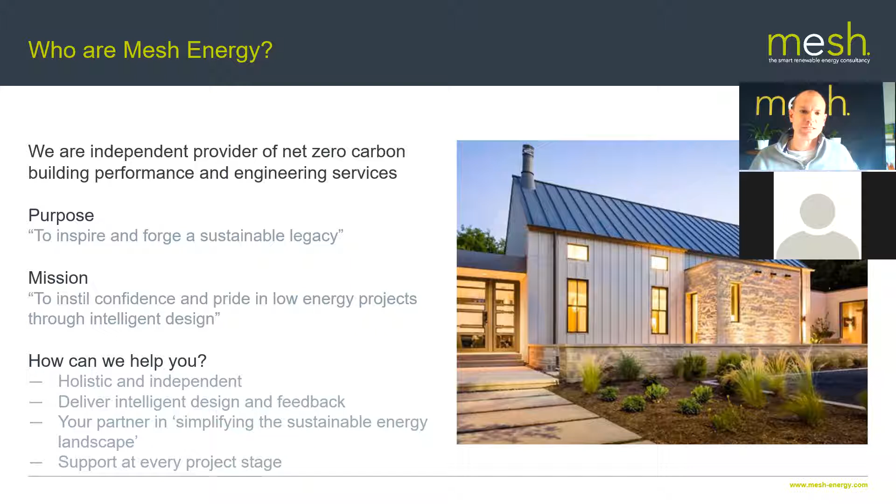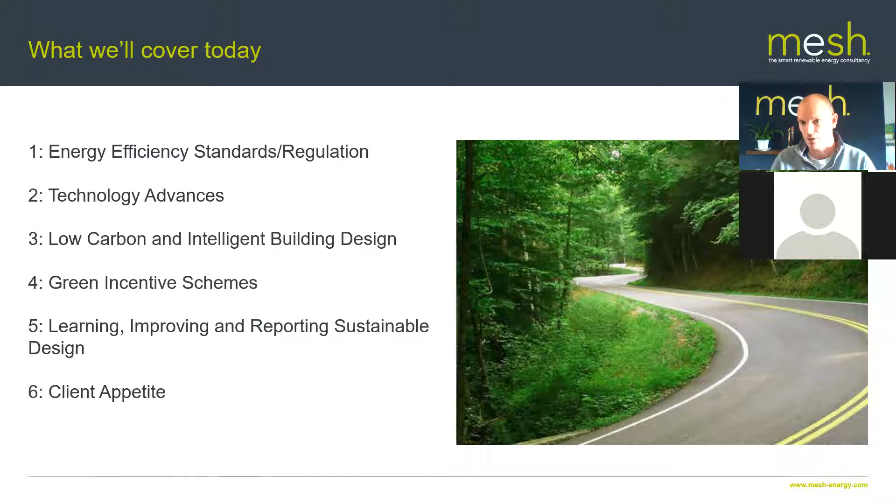We'll be looking at learning, improving and reporting sustainable design, some of the trends that we see there. And then finally looking at client appetite. I put client appetite in last year's presentation, and it's fascinating, as we'll go on to see, the sheer demand for sustainable design and the big market appetite for that. So we'll go into a few bits around client appetite and what we're seeing. A few things to cover there.

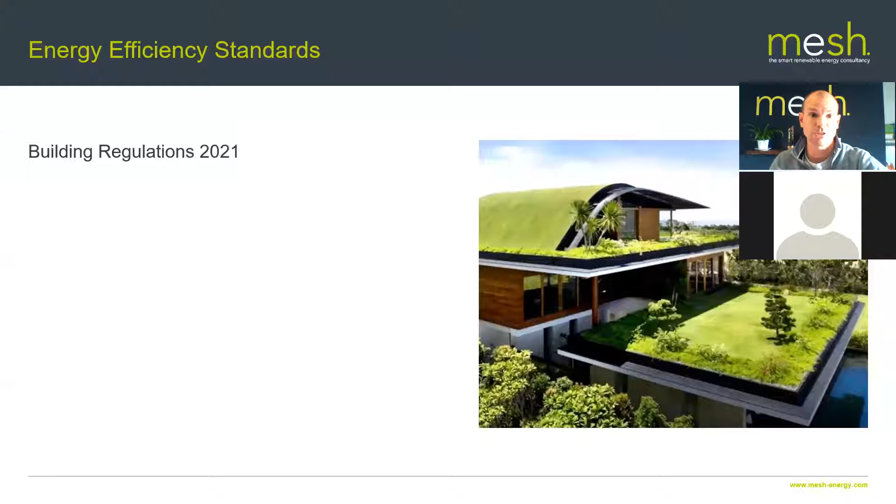Let's start with energy efficiency standards. We've got the building regulations, which we know are changing this year. They're changing in June. It was announced in December that the building regs in the UK are coming into effect, and there were consultations over the last couple of years. This is all working towards the Future Homes Standard, which comes in the middle of the decade in 2025, which will come around very, very quickly. So this is a kind of stepping stone.

The fundamental changes here are to Part L, which is around energy efficiency, and Part F, which is around ventilation. They've made a few changes to Part F, nothing particularly groundbreaking, but the biggest change or the biggest step forward is around Part L. This looks at a 31% carbon reduction based on today's regs, and this will be achieved through a combination of fabric and renewable technology.

So essentially by law, you won't just be able to bolt solar PV panels on, or put an air source heat pump or ground source heat pump in. You're going to have to improve the fabric of the building to new notional U-value levels and do renewable technology to get you to that 31% reduction.

The other big change which is coming in is the new Part O for the building regulations, and this is around overheating. Now this for many years has caused increasing headaches, particularly in London and other built-up areas. This was led by the Greater London Authority, really, and the push by the Mayor of London to increasingly look at overheating and avoid the heat islanding effect. But this has now spread to the wider regulations, and we're going to do a whole CPD on the overheating standard and what is included in Part O and has been released.

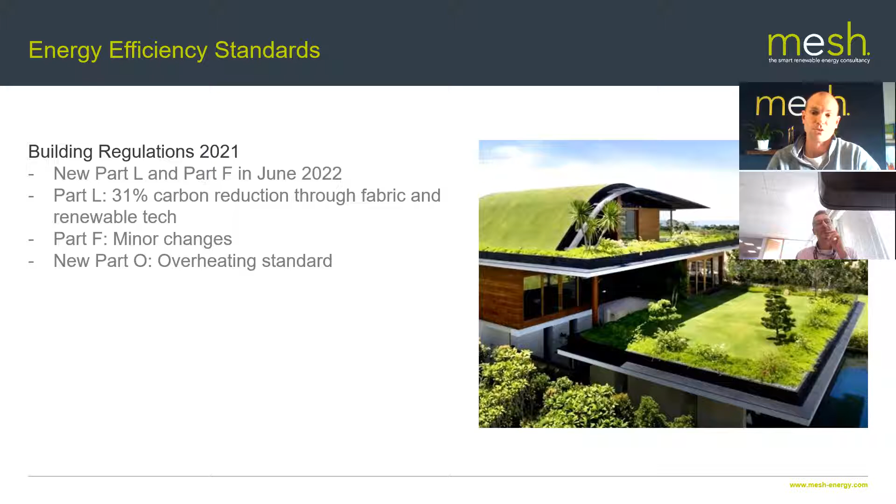Or some other building physics package, which we kind of do as standard, but whilst this was optional before, it's now going to be regulation as of June. So again, people trying to push the boundaries domestically with the amount of glazing they're trying to put in, or doing commercial work, you're just going to have to do this. It's not mega money, but it's something you're going to have to do to prove due diligence, making sure the health of the occupants because of thermal conditions throughout the years is a key priority and within thresholds.

So our prediction here, our comments are: building regs changing, that's great. It should have happened a couple of years ago, but it didn't. It's happening now. It is an improvement, and the Future Homes Standard in the middle of the decade will see a 70%, 75% reduction on where we are today. So this is a great stepping stone, giving us a few years to get used to it before moving up to the next level.

But you will have seen this a lot in the press if you read around this. It doesn't really go far enough. We're going to see regulations falling well behind what the industry expects buildings to be achieving, what clients want buildings to be achieving, and where the market's going. So looking at both fabric improvements and technology improvements is great, but really, as soon as these regs come out, they're going to be obsolete. People are going to be building in advance of where these regulations are at. So it's great, and particularly with the overheating standard, a big thumbs up for Part O coming in there. That is definitely something which we see as a big positive step.

Whether by lack of education, naivety, or just laziness, buildings that should have had overheating work done on them didn't, and really suffered once they've been built. So that's a great obstacle to overcome by law. We see it kind of coming in - a great move in the right direction, but overall the changes to the regs are a bit lukewarm. Really, the market will have moved on. They should have gone the next step to make them relevant for the next few years.

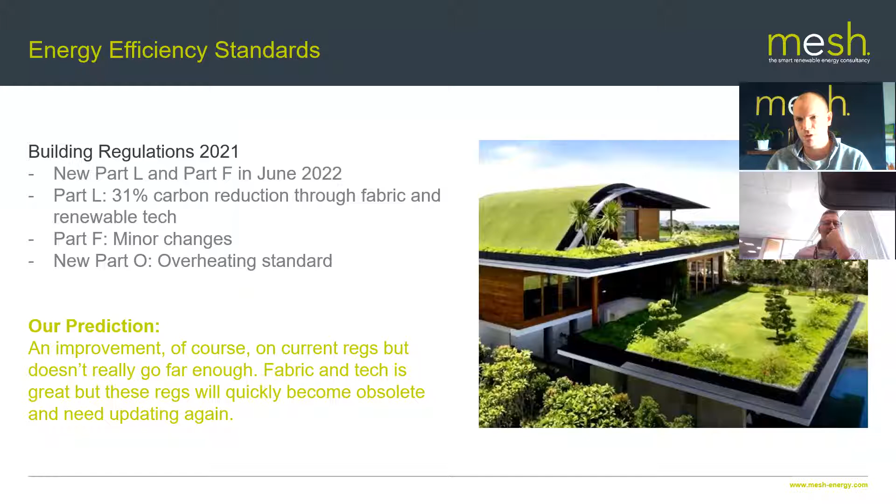We'll do plenty on the way these regs are changing, how they relate to RIBA 2030. I think we're going to do one video in February and one on overheating. So we'll unpack this a lot more, but this is what's happening.

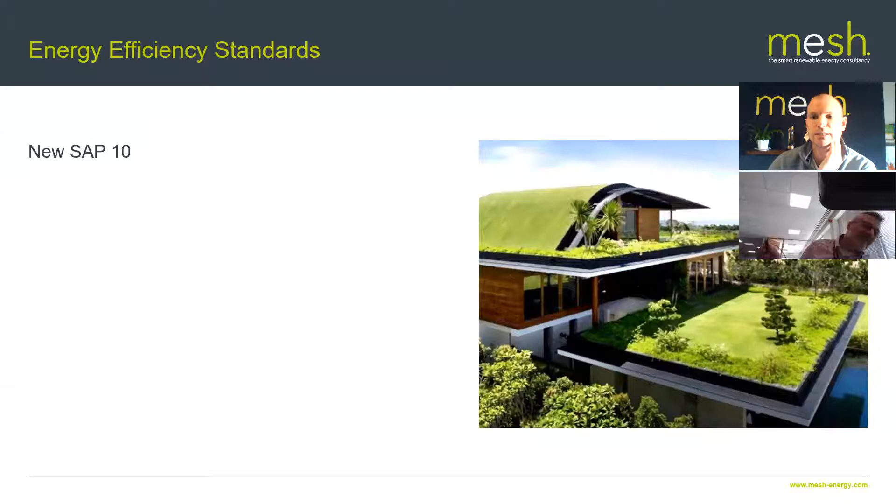In line with the change in regulations, we're going to see a long overdue update of the Standard Assessment Procedure calculation - SAP, and it's now going to be SAP 10. I think it's 10.1 or 10.2, can't remember where they've got up to, they keep tweaking it. But they've talked about releasing this over the last few years. When they release the new building regulations, this new assessment methodology, which you get your EPC from at the back end, is going to change. There's quite a few changes here which are really making SAP calculations more intelligent. They're still a fairly blunt tool, but they are moving on as part of this new release.

So a big one here is the changing, or reducing, electricity carbon factor. Over the last decade, the electricity decarbonisation of the UK's grid has undergone massive change and decarbonised by at least a third, but current SAP calculations don't take that into account. So the new SAP 10 will have a far smaller carbon impact when you're using electricity, which is great if you're putting heat pumps in, or other electrical devices in. You won't get penalized anywhere near as much as you did.

There are new lighting details you can put in. You can now say you're putting energy storage in and solar diverters into the building, which will have an effect again on energy usage of the building. You can include shower flow rates, whether you're putting in electric showers. So there's a few more details you can put into the SAP calculations. Wastewater heat recovery will be more prominent.

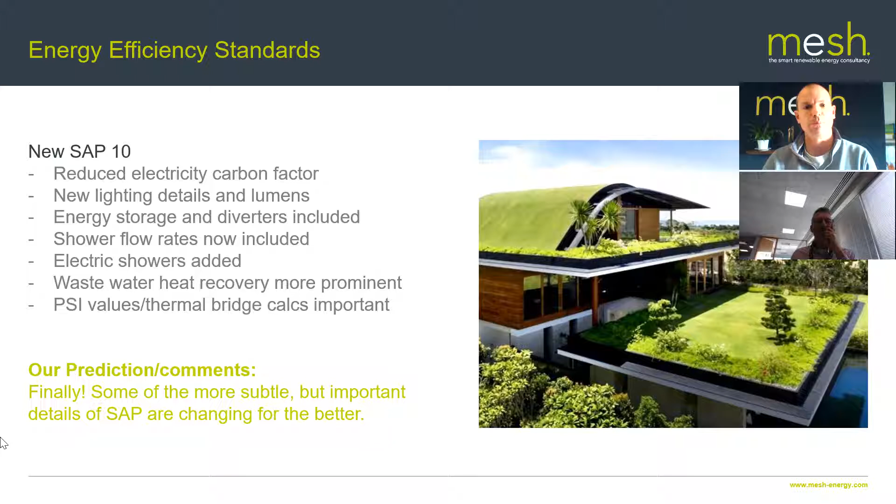So this is all going in the right direction. It's frustrating how long it's taking, but it's great that SAP will be updated at the same time as the other regs in June of this year. The other thing I wanted to mention here was various kind of standards and guidance.

We saw a great amount of work from LETI and in part the RIBA happening last year. I'm not aware that the RIBA 2030 climate challenge is going to change or evolve this year. I think it's just there now. They've laid out their stall, made a slight revision to it. We've got a few different buckets or building types and targets for embodied carbon and health and well-being. I don't think that's going to change, so use the current climate challenge documentation as read.

As far as embodied carbon goes, I think what we will see is a lot more guidance this year on embodied carbon, how to understand it, how to accurately model for it. Software companies like One Click LCA are pushing hard to try and create tools and build that database of embodied carbon for a vast amount of materials and catch up with the marketplace. I know a lot of manufacturers are pushing to understand and document the embodied carbon that goes into products as well, so that you can put that data into your calculations. But there will be further lobbying to try and move the embodied carbon discussion ahead.

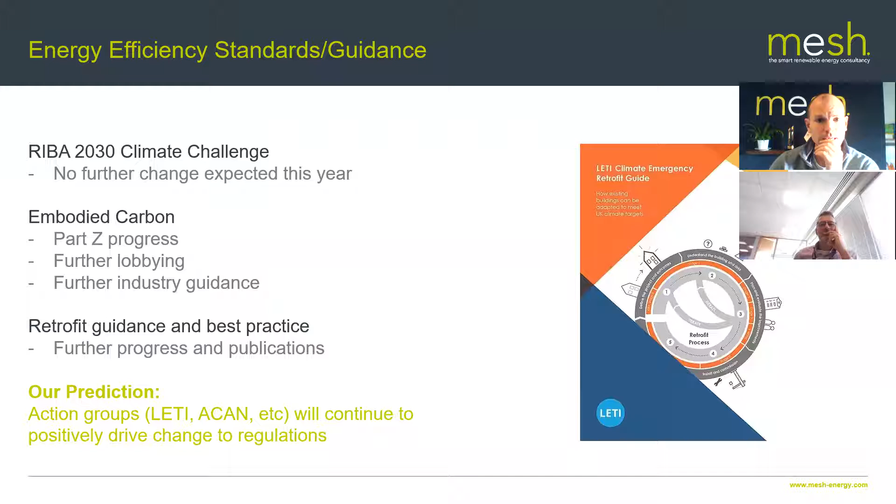The next thing that I've got on here is around technology advancements. So what are we going to see technology-wise that's going to be impressive or different? Well, I had a chat with Graham Hendra. A few of you may have heard us mention Graham Hendra. He's going to be a content partner for MESHWORK. Knows a huge amount about heat pumps, helps a lot of people out in the heat pump arena. He's going to be giving a talk with David in a few weeks' time, David Reed of Mesh Energy fame. I actually had a chat with him yesterday to just kind of see if I could fill in any of the blank spots that I wasn't aware of.

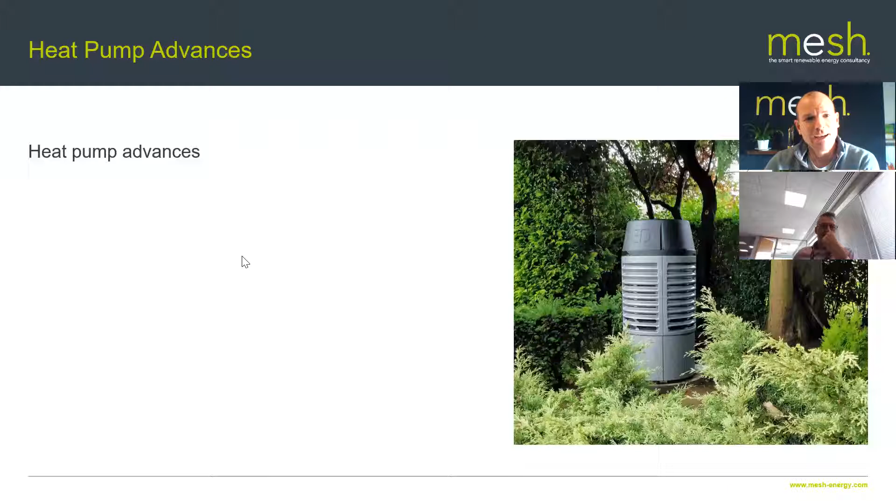And an interesting conversation - there is a lot happening in the market, but there's not a lot happening in the market. And what I mean by that is there's a change in subsidies, which I'll go on to talk about in a moment. But air source heat pumps are becoming the talk of the time at the moment. A lot of people are trying to figure out how they don't put in a gas boiler, what the uplift is for putting in air source heat pumps. People understand a lot more about what they are, what they look like, what they might cost, and how capable they are compared to gas boiler systems. So there's a lot more familiar chat, both professionally and with the clients around this.

Incrementally, there will be better coefficients of performance for these devices. We're not going to see some kind of radical doubling or tripling of coefficients of performance, but something that came into the media recently, which isn't necessarily a new thing - there was a Dutch company who announced that they were bringing out a high temperature heat pump. For those of you who aren't familiar with what that means, essentially if you had an oil or a gas boiler in an existing property producing 70 odd degrees, 75 degrees hot water temperature, you could take that unit out and put an air source heat pump in, which meant that you wouldn't have to change the rest of the infrastructure within the building.

So it's a kind of like-for-like pitching at the retrofit market, easy to install, gives you the high flow temperatures. Yes, it uses more electricity, but there will be a few other products coming to market. Daikin have done a high temperature system for a long time.

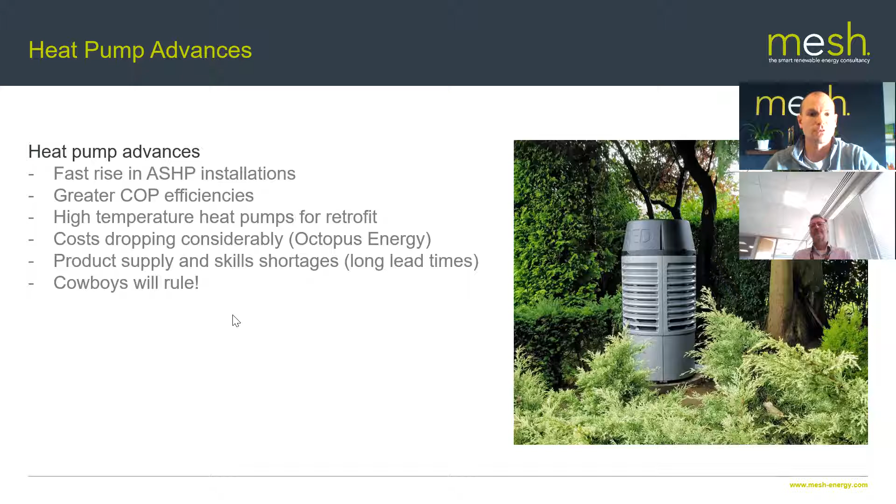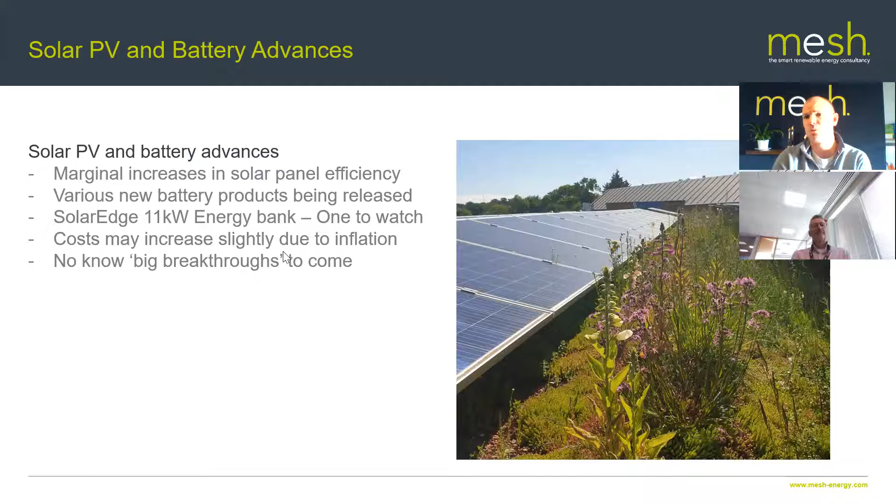Solar PV and battery - this is an interesting one. I did a lot of digging around here. Again, I'm not sure at the moment solar PV is going to change anybody's life next year or this year. I think there will be marginal advances. They're talking about a new type of solar cell getting about another 30% efficiency, which is seeing great success in the labs, but that's not going to hit the market this year - maybe in the middle of the decade something might happen. So again, there'll be marginal increases in efficiency.

But what we probably will see more of this year is more battery products being released. SolarEdge, at the end of last year, have done fantastic things in solar panel monitoring, and they just released their energy bank. SolarEdge particularly, just for getting that the kind of software and applications that they use for their products, they came out with an 11 kilowatt battery system.

A Tesla system's about 13, 14 kilowatts. So this is a slightly smaller product, but if the work that they've done in the solar market is anything to go by, I would watch out for their battery product.

And obviously there's going to be a lot more competition, a lot more battery products released. These battery products will have apps which will allow you to link them to your electric vehicles, your electricity supply for the home, to tailor them, to tweak them, to help really maximize their storage and also provide power cut protection. So these systems are a lot more intelligently connected to others and have bigger brains. So do watch out for other battery releases in the market.

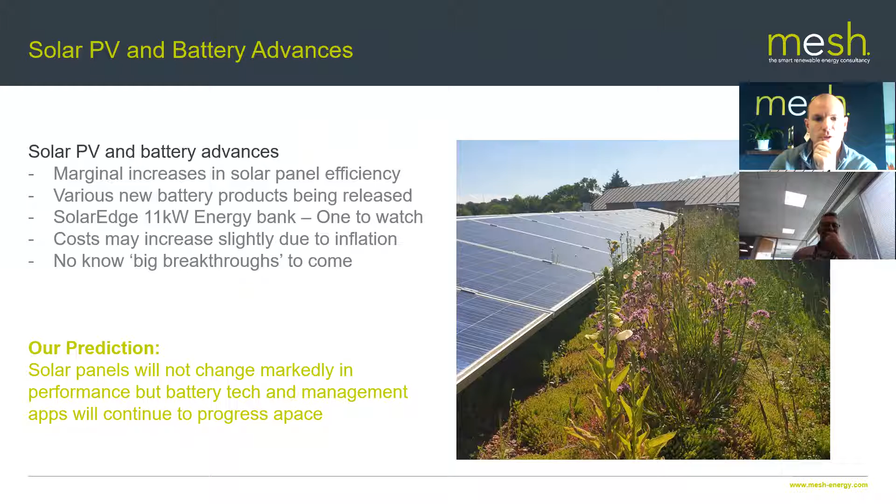So again, our prediction, nothing massively changing solar panel wise. But solar battery tech will continue to bleed out into the market, and some of the apps should be quite impressive as well.

So, low carbon and intelligent building design. This is more of a higher level theme. Think here - we've talked about embodied carbon already. The GLA will continue to consult, and with this Part Z lobbying that's going on by the wider community, Greater London Authority always leads the way on this kind of stuff, so it'd be interesting to see how this develops. I haven't heard anything on the grapevine about particularly what is coming out this year.

But their focus does seem to be on whole life carbon at the moment. They're very, very focused on that. They've nailed a lot of the overheating and set some very strong targets, 30% better than current regs, and obviously when those regs change, that's going to be a 61% reduction that buildings are going to have to achieve in London as a minimum.

But embodied carbon is where they're going to be focusing their energy this year, and who knows what they'll come out with. As I say, there's a big push to further understand it and report it, which I'll touch on in a minute.

Just more generally, circular economy wise, again, we have seen more and more manufacturers actually documenting and stating on data sheets what the whole life carbon is of that particular product. So if you are more interested in looking at whole life carbon for developments, putting into calculators, you've actually got some hard and fast figures there, which should be third-party verified.

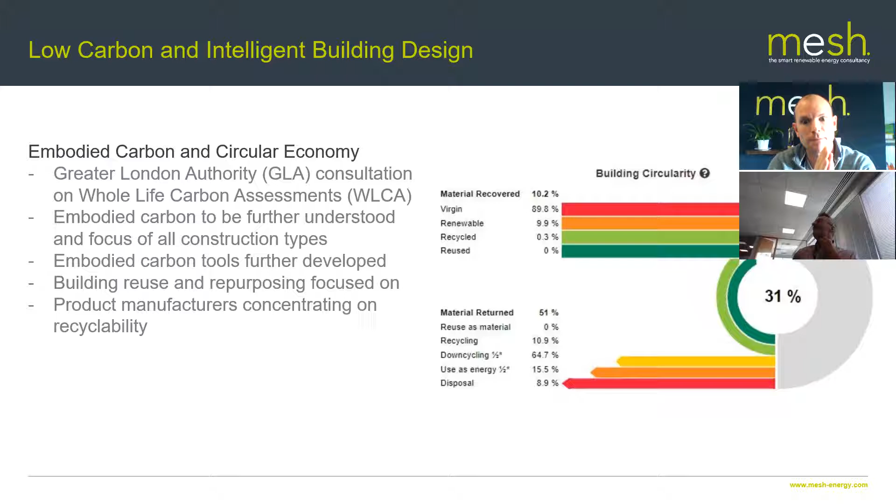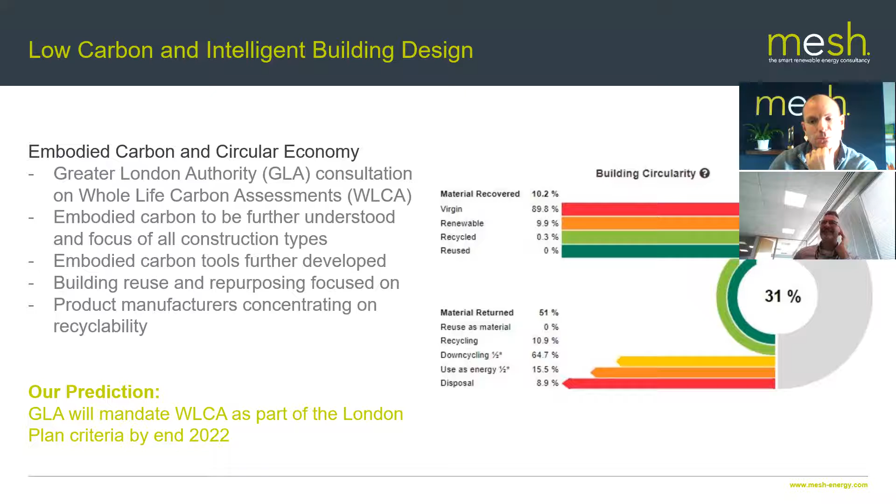There'll be more EPDs on the market and more products to choose from, more data that we can share, which hopefully makes your embodied carbon reporting that much more accurate. We thought that the GLA would mandate whole life carbon as part of the London Plan by the end of last year. There's considerably more chance that will be the case by the end of this year, probably 90-95% probability if I had a gun to my head.

As far as building analysis tools are concerned, we saw a fantastic advancement in the way people were using them, certainly more educated architects were using building tools and talking to their clients about using those for the wider benefit of projects. We are convinced - in fact, we've got more people joining the business that are trained in that and training up in that. That is only going one way. It's not going to reverse.

Buildings continue to be complex beasts. The sustainability hurdles - embodied carbon, operational energy and water usage - are again elements of building design that aren't going to go away.

And we need software, and there will be more pressure this year using software to help unpick that at a very early stage, benchmarking designs, hopefully light touch so it's not too heavy on the wallet, but quite quickly then moving on with that centralized building design and creating far more group discussion when it comes to, right, okay, wow, we're there already, or we've got a way to go. This is how we revise the design, or let's come up with some new ideas to really make sure we can tick all the boxes and reduce risk on projects.

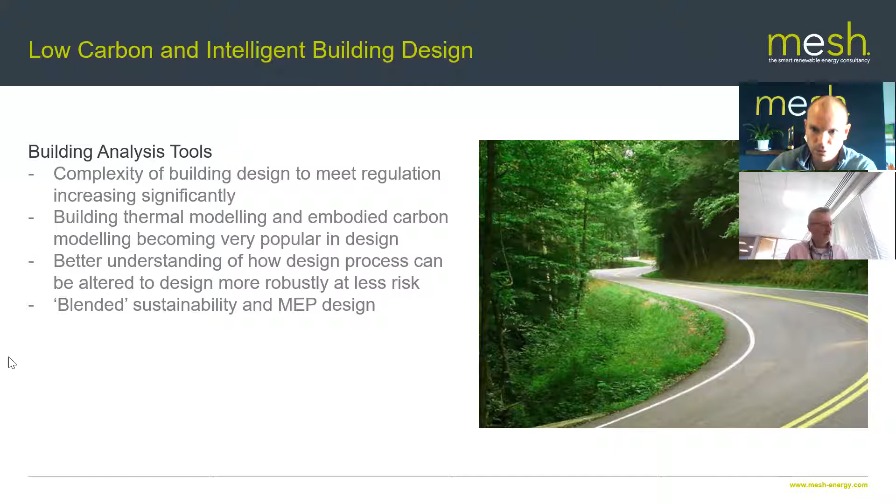The other trend we've seen is, as we've done more mechanical and electrical design work as a business, there have been greater requests for what we call blended sustainability and MEP. Rather than having a traditional M&E consultancy on a project as well as a sustainability consultant, finding partners that can have a foot in both of those camps and bring gravitas to both discussions not only saves a huge amount of money for projects, but allows more flowing conversations as you move through the RIBA stages, and identify issues as early as possible. So we will see more intelligent MEP design talking about sustainability, and hopefully more sustainability consultants raising MEP issues at an early stage. That's a trend we'll see increasing into this year.

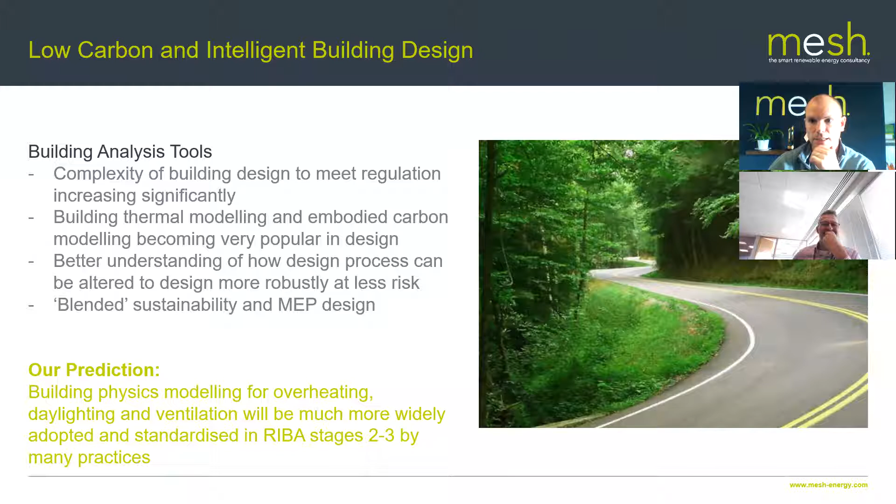More generally, because of the way the RIBA framework's set out and holistic building design is being talked about now, centralized modeling is the only way in which you can look at daylighting, overheating, ventilation, embodied carbon all in one place. That is the most cost-effective way of doing it. So as some practices draw a line in the sand and say we're only going to be designing buildings to these progressive standards or net zero carbon, there's no other practical way to do that other than using centralized modeling, using some kind of widely available, albeit professional, software. So I think more people will be jumping on that bandwagon and hopefully educating themselves as to the sums of money it takes to do that, but also understanding that it's not a huge amount of money, and the client can easily bear it given the benefits it can bring to a project.

Net zero carbon design, I had a slide on this last year. Over the last few months, net zero carbon design, the volume has really been cranked up quite significantly with this, and discussions have really made me look up and the business take this more seriously than we were previously. We were focused a lot on the RIBA targets, but the appetite for net zero and understanding what it takes to get there, the frequency of conversations has definitely improved markedly over the last quarter. So the biggest issue we see in the market still is understanding what net zero design actually means. There are still multiple definitions of net zero swirling around in the marketplace, but understanding whether you're going to hit all of the definitions, one of the definitions, and the logical process or progress you make through a design in order to get there most cost effectively.

Again, we will see more practices embracing, and this is very much about collaborative design going into next year. We've seen the most successful practices and teams we've been a part of have all been ready to share, ready to do research, as they share what they know and tackle problems together, rather than going for a very super duper specialist in one particular area and taking their knowledge as golden and not really questioning it. So collaboration around net zero carbon design, further understanding, further reading, further guidance.

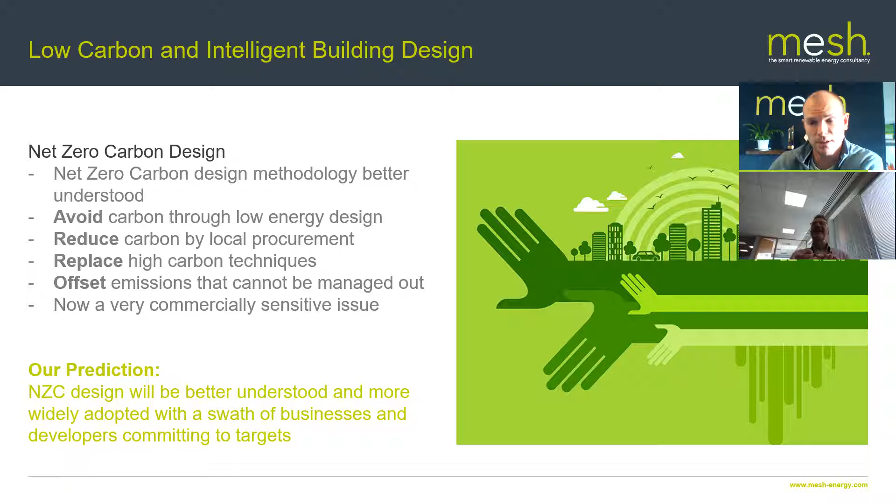I think a lot of people are being surprised at how little extra you have to do if your design process is robust. If you can get to RIBA 2030, you can get to net zero carbon design based on the current definitions without too much trouble at all.

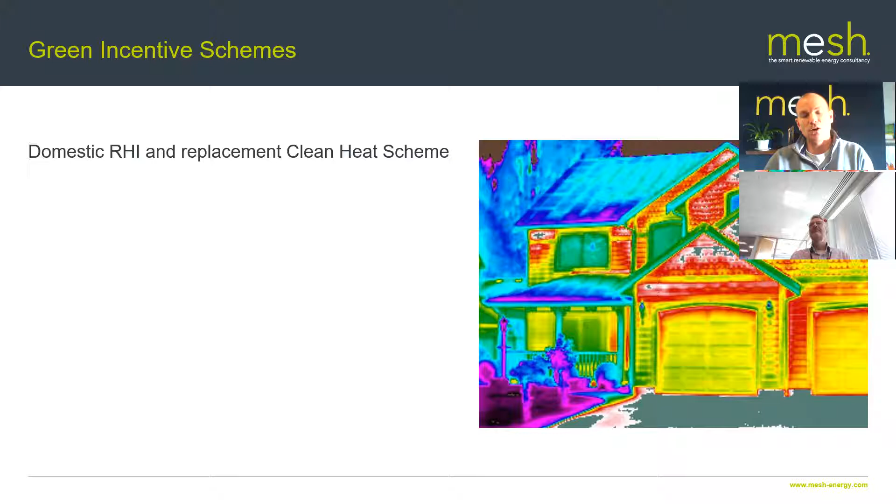So green incentive schemes. The domestic RHI, the domestic renewable heat incentive, is coming to an end in March of this year. The scheme's been running for 7 or 8 years, and actually quite successful - a lot of people have got free, tax-free government money from the domestic scheme and also the commercial scheme, which ended last year. So unless you've got an allowable extension, the domestic RHI scheme comes to an end.

The good news is, as we predicted, the scheme will continue, just with a different name. Rather than getting paid out over 7 years, you're actually going to get an upfront grant. Previously you might get a bigger sum of money, say £10,000 domestically, but it would get paid out over 7 years and you would have to foot the bill.

With the clean heat scheme, or the boiler replacement scheme, when that comes into effect in April, for air source heat pumps you'll get a £5,000 upfront grant, which your MCS accredited installer will have to claim, and you'll get your price knocked down. If you're putting in a ground source heat pump, there'll be a £6,000 grant as well. I say it's a grant, not a subsidy, so it's upfront savings rather than changing the financial dynamics of the transaction.

Importantly, it's only for existing buildings, not for new buildings, and it's for replacing oil and gas boilers only, as far as we're aware - LPG boilers probably will be scooped up too. But it's only for existing buildings, whereas the current domestic RHI scheme scoops up new and existing. So that's really critical. New buildings now should have this stuff put in, and they should be efficient enough so the units are small and don't cost exorbitant amounts of money.

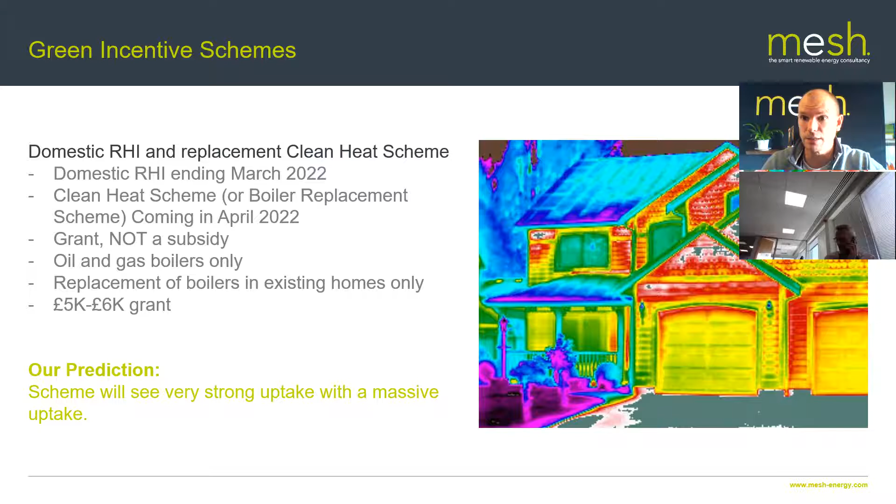There will be very strong uptake for this scheme. I can't remember how many grants they've made available, something like 30 or 40,000. Seems like a big number, but there will be a big scrabble for this free government money, and it may cause issues with supply and lead times for getting this kit installed. There's always a big uptake for a scheme where the government's handing out money, particularly grants, and I don't think this will be any different.

So, learning, improving and reporting in sustainable design - we shared this last year, but collaboration will continue into 2022. There are more people coming out of their silos, and I hope that collaboration, helped in part by the MESHWORK platform we've got, increases. Design teams hopefully will get more prepared to work with one another and share information, and that will become more commonplace.

As we know, if you've been on any of these webinars before, success in sustainable design is all about sharing information. If you keep what you know to yourself, and everybody else does that too, you're guaranteed to take a big swing and probably a big miss on what should be a sustainable project. They are very strongly linked. People generally know we need to move on - collaboration is more important, and we'll see more of it to solve greater sustainability challenges going forward.

Post-occupancy evaluation, again we touched on this last year - it's still very much a key RIBA stage. The Building Performance Network has done some great work through 2021. If you haven't or aren't aware of the Building Performance Network, do get on and check them out - they're doing great stuff, with case studies and loads of knowledgeable people who have been doing post-occupancy evaluation for a long time.

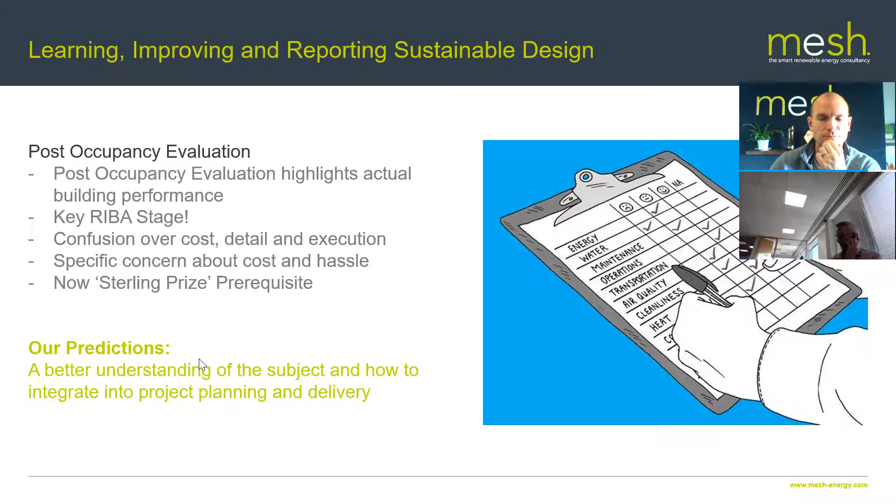So again, clarity on what post-occupancy evaluation actually means. More architects I've spoken to are keen to involve this from the early stages. I think more people will get that and understand that's a fundamental part of modern day responsible design - understanding what happens after you hand the keys over.

I've added this sustainable design reporting in. Over last year, obviously RIBA, the climate challenge changed, and work with LETI and the RIBA made it much more clear how you can report on embodied carbon and some of these other metrics of sustainable buildings.

It may seem like another thing to do. A lot of designers have got a lot to do anyway, and it may seem like a right hassle to do it. But I can promise you that if you do this in line with maybe some more centralized modeling of the buildings, using the right kind of software, it's actually a very small change once you've built a building in 3D.

And the amount of information that's out there about embodied carbon, and some of these free tools that ourselves and others have got out there, you can very quickly understand a lot of detail about the embodied carbon and sustainability metrics, operational energy usage, and all these kinds of things. It's just a simple output - you've done all the hard work in designing the building anyway, and this is just an output you should be using for benchmarking.

But reporting more generally is key for peer review. These elements should mean more to the design team. It makes it easier now that we've got a framework to review against - where it was at, other projects that you've done, other projects that other practices have shared.

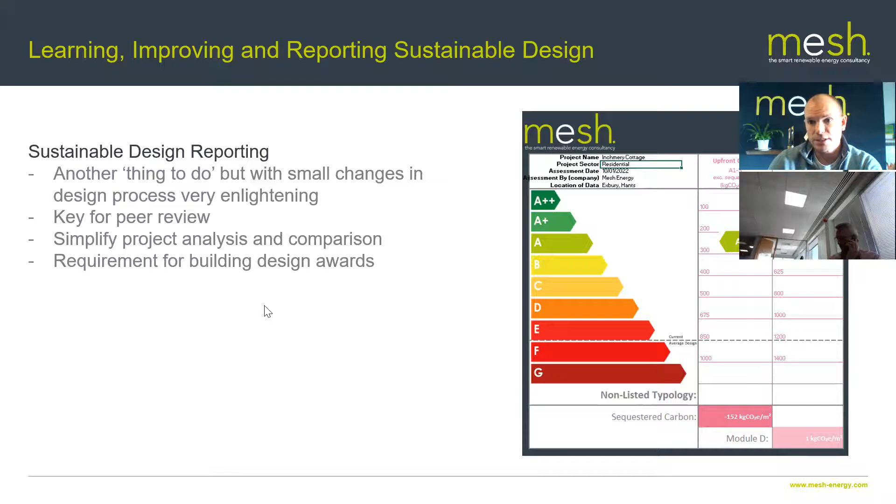And all that documentation's out there to read, and we've built that into our Excel calculator, so it automatically documents it once you put in some known things about the buildings.

So there'll be far more frequent requests for sharing building performance information, and increasingly between more educated clients as well. So we've got awards asking for information, we've got clients asking for information, and within your teams as well, as you progress you might want to compare against how your peers are doing or how your other buildings are doing - there may be internal and external pressure for better reporting.

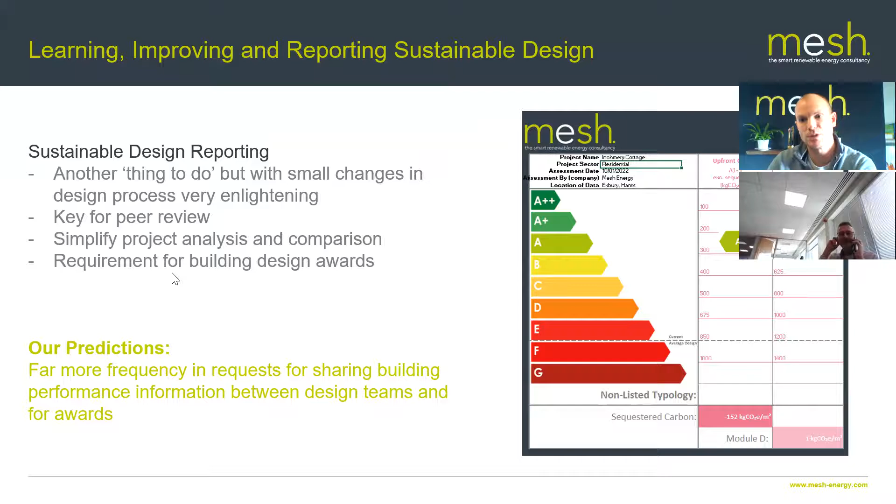I say if you can make small changes to your design process in 2022, you'll see big gains with the insight that you get into those projects.

So finally, client appetite. Well, this is one of the last slides that I've got here. And last year, more than any year that I've known before, having been in the sector for the last 15 years, is clients are far more educated. There's far more information that they can read, and they're coming to the table with a lot more what ifs.

We've had a lot more clients coming to us saying, it's right, we're designing this group of houses or this particular sports center, whatever, to net zero carbon or RIBA 2030. There's no two ways about it. How do we do this? What work do we need to do? We're not going to accept anything less. And how does this feed into the wider cost plan?

So a lot more clients pushing design teams to advance their thinking, well in front of any building regulations, and certainly in the domestic market. And a lot more clients now just aren't the slightest bit interested in putting in gas boilers, and will be prepared to pay a bit more money for an air source heat pump. They just get that it's worth spending more money on building fabric.

Commercial clients are starting to see the value of sustainable buildings in their estates, both from a marketing point of view, but also from a rental premium or asset uplift that they can get from sustainability.

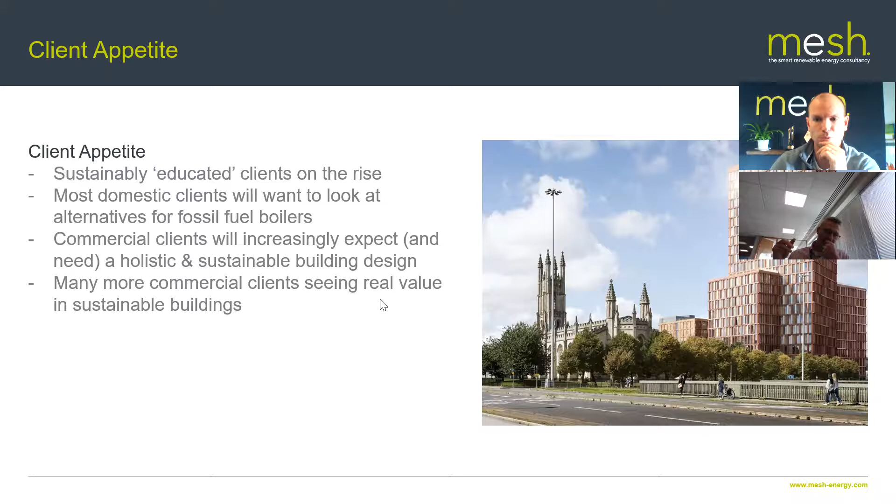Really interesting dynamics from clients. Also institutional investors - the way money is flowing down, particularly for developers, from institutional investors is changing. They may get preferential borrowing rates, or they may just not get money at all if they don't develop sustainably. So client appetite is changing, both domestically and commercially, and you'll see that accelerate further. As people realize what needs to be done and the relatively low impact on construction cost to get to those levels, it's a snowball effect - people change what they're asking for because there's lots of upsides and very, very few downsides.

So guys, I'm going to wrap it up there. What I want to do is invite you to ask any questions or share any trends that you think will come this year. I've mentioned a fair few and shared what I know. Invariably some of that will come off and some won't, and it'd be great to know what you guys are thinking as well.

So let me give you a couple of minutes to do that.